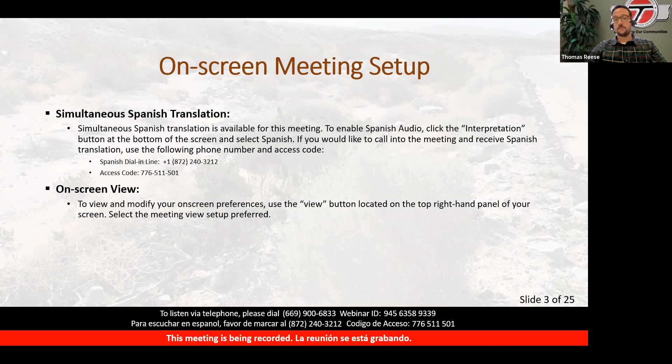The purpose of tonight's meeting is to provide information to the public on the proposed project, to describe the environmental review process and subsequent decision-making, and to solicit input from the public on the draft initial study, or IS, with proposed mitigated negative declaration.

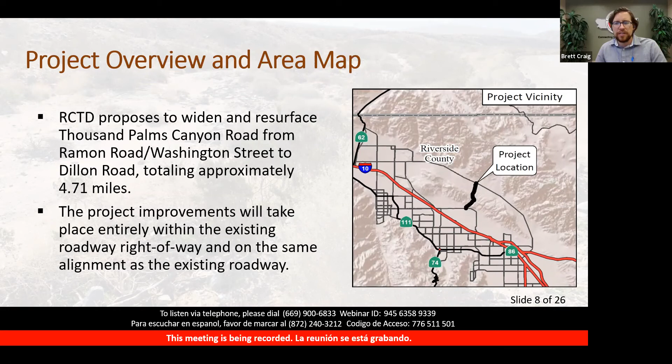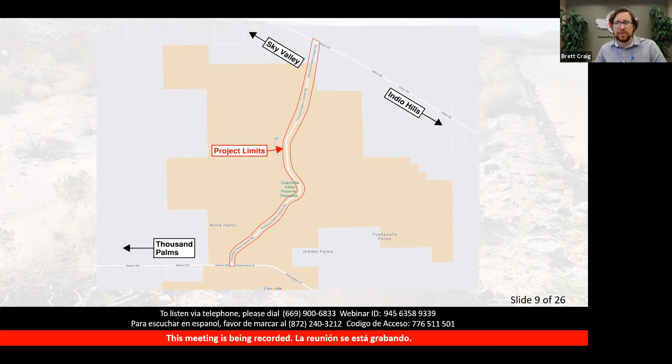There's a more detailed picture of the project limits bounded by Ramon Road, Washington Street, and Dillon Road. This road mainly serves the communities of Thousand Palms, Sky Valley, and Indio Hills, and is the main route between these three communities. There's also the Coachella Valley Nature Preserve in the middle, which attracts a lot of visitors, bicyclists, and vehicular traffic.

If you go to the next slide, we can talk about the existing conditions of Thousand Palms Canyon Road. It has a pavement width of approximately 22 feet, 11-foot through lanes, and 1-foot paved shoulders. There are graded dirt shoulders of varying width along both sides of the road, bounded by dirt berms. There's also a half-mile segment of Thousand Palms Canyon Road near the nature preserve that's a bit wider, 32 feet wide, with 12-foot through lanes, 4-foot paved shoulders, and graded shoulders on both sides.

The area in the immediate vicinity of the roadway is undeveloped except for the nature preserve. The middle portion of the road was reconstructed in 2019 after it was washed out during storms that year. The roadway currently doesn't have a dedicated bike lane and is in need of widening, resurfacing, and other safety improvements.

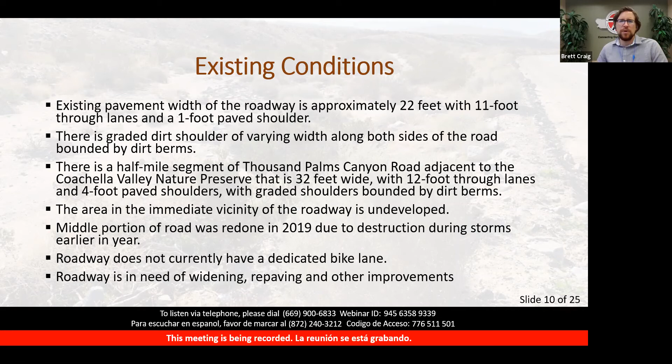Some of the proposed project improvements: we are going to widen both sides of Thousand Palms Canyon Road and resurface the top. We are also constructing a right turn pocket for southbound traffic into the Coachella Valley Nature Preserve, and a left turn pocket for northbound traffic into office buildings 2,000 feet north of the preserve. We're also constructing safety edge pavement end conditions, installing rumble strips, widening paved shoulders, grading dirt shoulders and berms, installing and removing traffic signs, applying traffic striping and thermoplastic pavement markings. This project will also incorporate a class 2 bike lane.

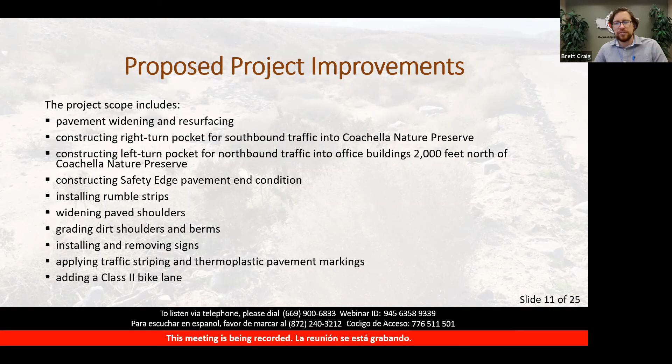Next, we can see the proposed cross section of Thousand Palms Canyon Road. This is what it will look like after construction is complete. This graphic helps you visualize the two 12-foot vehicular lanes and the two 5-foot bicycle lanes on both sides of the road for both directions, north and southbound. There will also be graded shoulders maintained on the sides for any vehicles that are stalled, so they can temporarily park there.

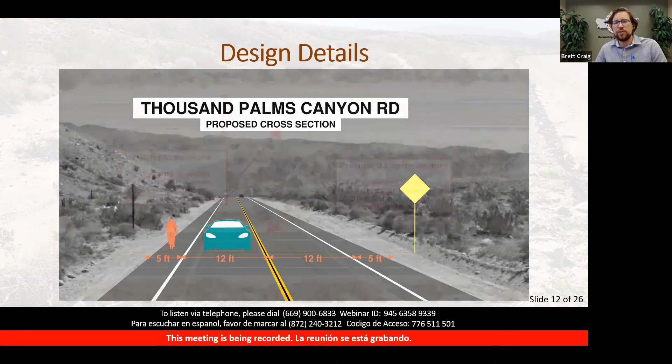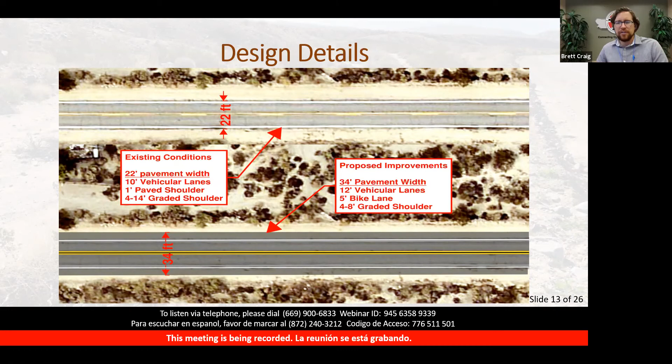Next, an aerial view shows what Thousand Palms looks like today on top: 22-foot pavement width, 10-foot vehicular lanes, 1-foot paved shoulder, and variable graded shoulder widths. The aerial picture below shows what the proposed improvements will look like when the project is complete. You can see we will have a 34-foot pavement width, 12-foot vehicular lanes, 5-foot bike lanes, and also 4 to 8-foot graded shoulders.

We'll talk about the project background. The scoping phase and preliminary design drawings have already been completed. The environmental phase is currently underway and is expected to be complete this summer, and LSA will talk more about that. Final design is planned to follow shortly after environmental is complete, and should be complete by fall 2021. Construction is going to begin in summer 2022.

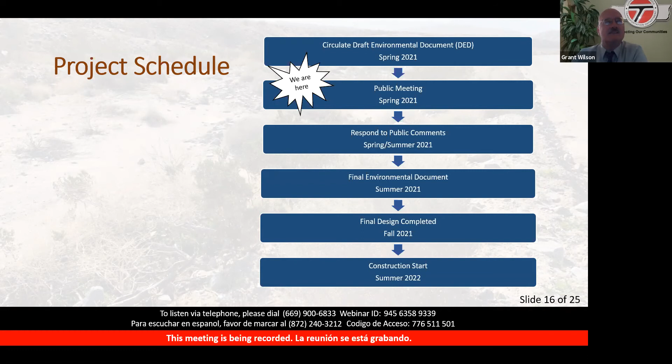The California Environmental Quality Act, or CEQA, requires state and local agencies within California to follow a protocol of analysis and public disclosure of environmental impacts of proposed projects. Environmental documentation for this project is an initial study with a proposed mitigated negative declaration. CEQA requires the public agency in charge of permitting the project, known as the lead agency, to conduct an environmental review. The Riverside County Transportation Department is the lead agency for CEQA on this project.

CEQA impact standards in the ISMND include no impact, where no impact was identified in the analysis; less than significant impacts, where impacts were not found to exceed the CEQA-defined thresholds of significance, including impacts reduced through avoidance and minimization measures; and less than significant impacts with mitigation, where impacts can be reduced from potentially significant to less than significant with mitigation measures applied.

Robert Kratzky will now go over the environmental analysis results for the project. Thank you, Grant. Next slide, please.

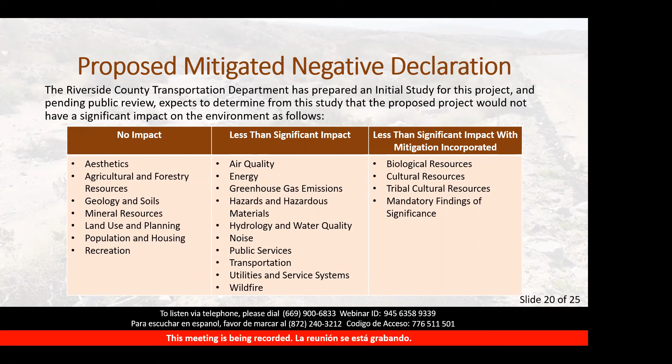We will now review some of the frequently asked questions that we typically receive on projects of this type. First question is, how long will construction take? Total construction time will be about 3 months, with 6 to 8 weeks of paving operations during the construction.

How will the construction impact traffic? Access to driveways will be maintained at all times. Drivers can expect to travel at slower speeds near construction activities. There will be occasional flagging operations to reduce traffic to 1 lane. However, this is to be limited to construction work hours only. Construction operations will also account for emergency access.

Third question is, will there be a notice before construction? All adjacent properties to the construction will be provided a notice of at least 1 week prior to the construction commencement.

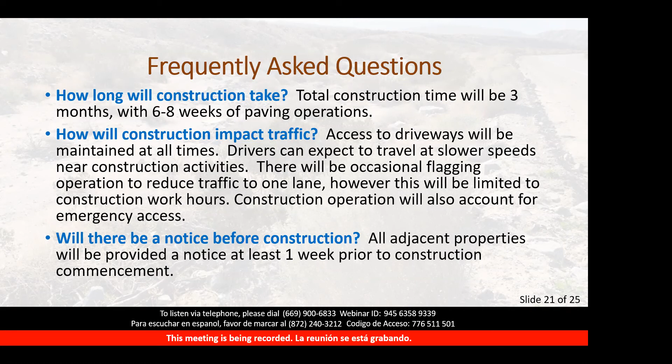Next slide. What are rumble strips for? Rumble strips are road safety features installed to alert inattentive drivers of potential danger by causing a tactile vibration and audible rumbling transmitted through the wheels into the vehicle interior.

What is a Class 2 bike lane? Class 2 bikeways are bike lanes established along streets and are defined by pavement striping and signage to delineate a portion of a roadway for bicycle traffic and travel. Bike lanes are one-way facilities, typically striped adjacent to motor traffic traveling in the same direction.

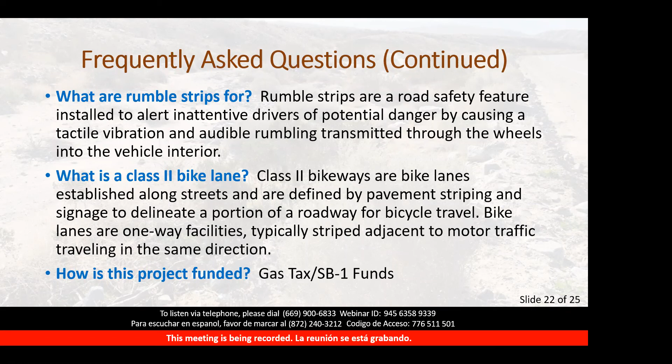And lastly, how is this project funded? It is funded through standard gas tax and related California Senate Bill SB 1 funds, such as vehicle registration fees. Next slide.

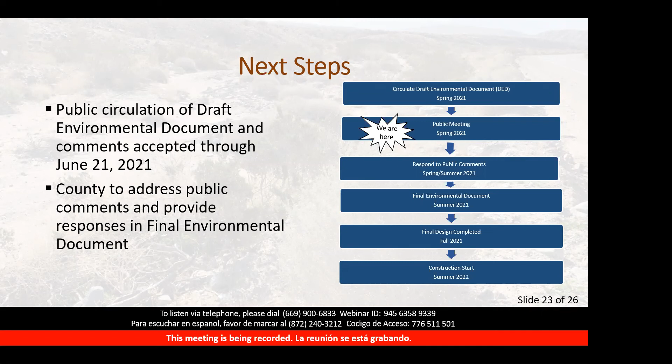The next step in the environmental phase of the project is completion of public circulation of the draft environmental document and accepting comments through June 21st of this year. Riverside County will then review the public comments and provide responses in the final environmental document. And Thomas will now take over for the rest of the presentation. Thank you, Robert.

The draft IS-MND is available for public review and can be accessed at RC Projects, that's rcprojects.org/thousand-palms, spelled THOUSAND-PALMS. Please contact Mr. Mohammed Isa, Associate Transportation Planner at Riverside County Transportation Department, if you have any questions. That mailing address is 3525 14th Street, Riverside, California.

92501. Phone number to use: 951-955-1506. And his email address, he can be contacted at meissa@rivco.org. That's rivco.org.

Comments will be accepted through June 21st, 2021. Written comments will be addressed in the final environmental document. There are 3 ways to submit your comment. Type your comment or question into the question panel of the webinar viewer during tonight's hearing. Again, that is located at the bottom of your screen.